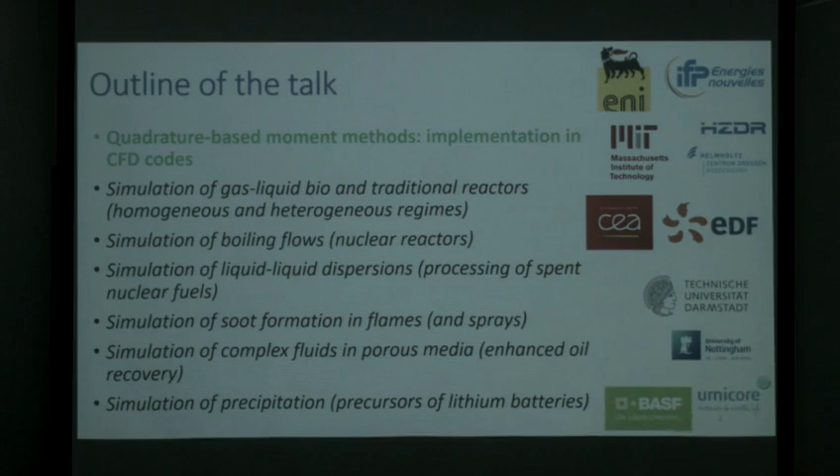Then I'll show you some of the recent work that we are doing in the field of boiling flows, liquid-liquid dispersions. Then there are a number of other applications that I will not talk about for the sake of time: soot formation in flames, complex fluids in porous media, and simulation of precipitation and crystallization of solid particles. As you can see, all these applications have something to do with energy production and energy storage, which is the theme of this workshop.

So some of the fundamental work is done with money coming from the European Commission, and following up on the discussion we had yesterday, I can, if you want, discuss some of the ideas currently discussed at the European Commission level in order to find ways to fund research projects in fluid mechanics.

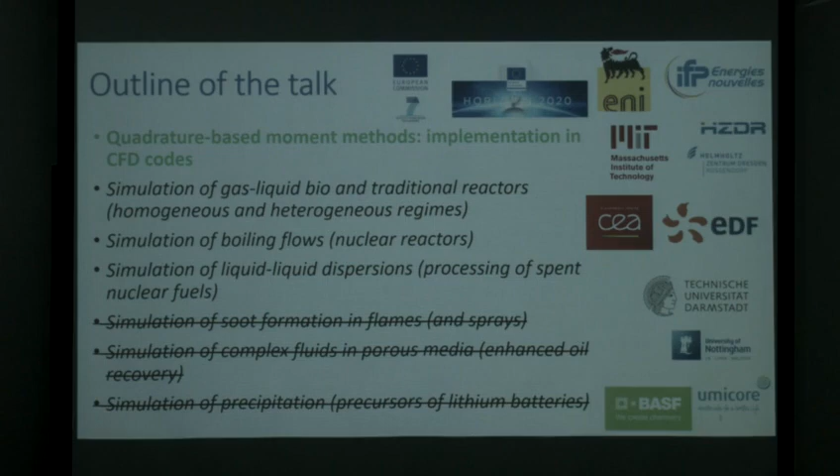All right, so what we do, as was explained by Rodney on Monday, is to basically look at multiphase systems through distributions by looking at this governing equation, this master kinetic equation. And the distributions we look at are bubble or droplet size distributions in our case.

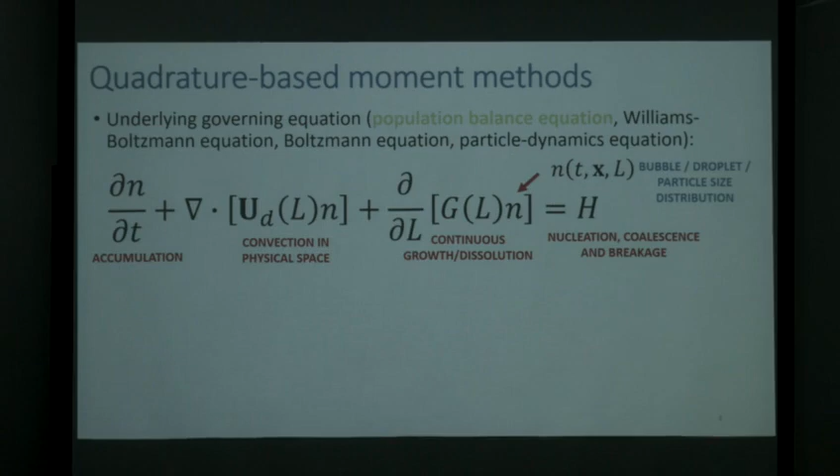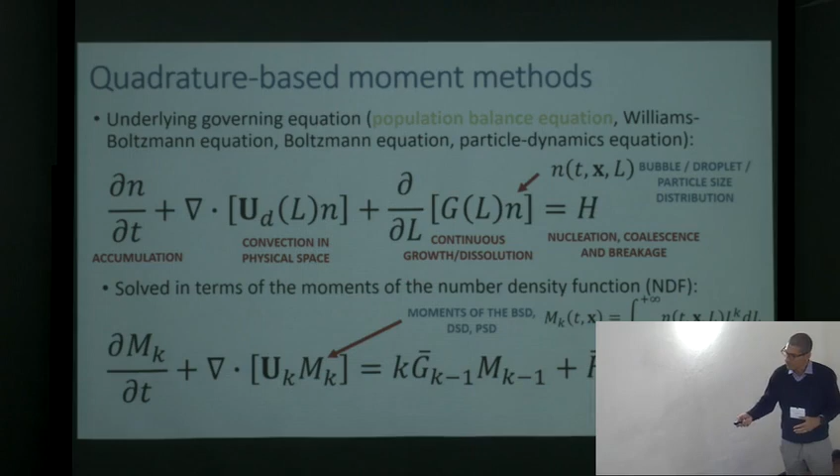And instead of solving this equation directly, what we do is to look at the moments of this distribution. So in this case, the moments are just functions of time and space. Therefore, the governing equation can be solved within CFD with finite volume discretization.

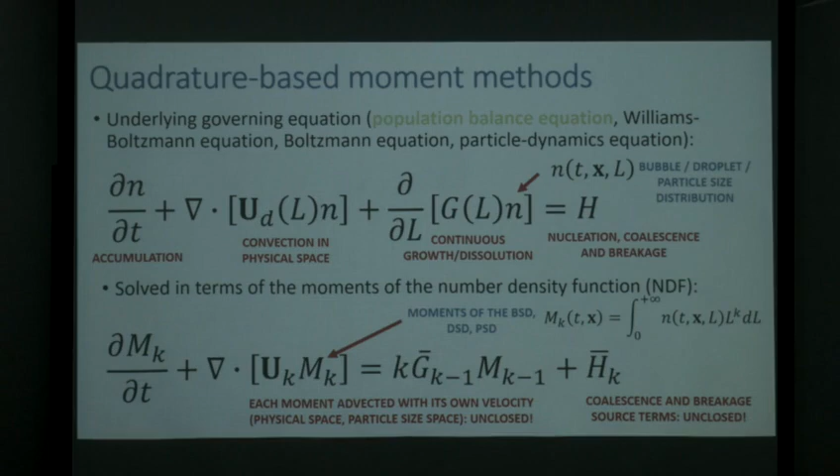You end up with a closure problem, and the closure problem is related to movement of the elements of the dispersed phase in the physical space, but also is related to the rate with which these elements of the dispersed phase, mainly bubbles in the presentation, coalesce. So one way to overcome this closure problem, which is a mathematical closure, is to use a quadrature approximation, because the closure problem is at the end an integral, and one efficient way to calculate an integral is to use a Gaussian quadrature approximation.

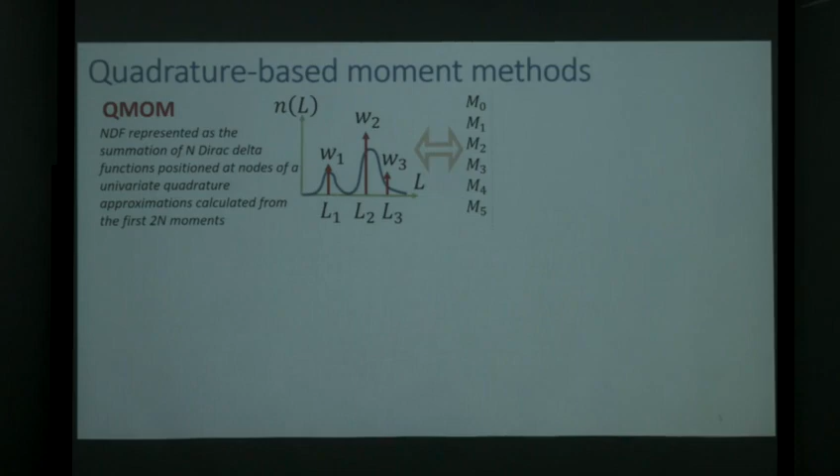So the idea is very simple. It was developed in the late 90s by McGraw. The method is called QMOM. We take a set of moments of these unknown distributions, and we use these moments to calculate the quadrature approximation, the nodes and the weights of this quadrature approximation.

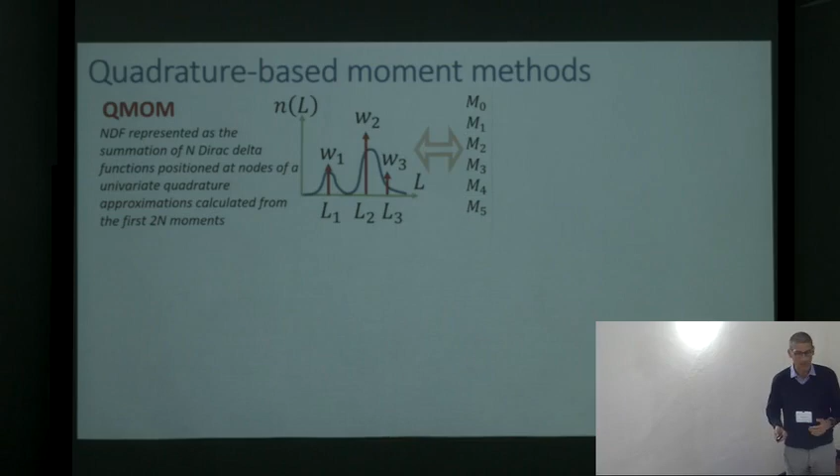This is basically equivalent to assuming that this population of bubbles and droplets is constituted by some small, medium, and large bubbles, and this is equivalent to assuming that the underlying distribution, which is unknown to us, is constituted by a summation of Dirac delta functions. This is nice, working very well.

However, when you are looking into multidimensional problems, for example, we are very often interested in bubbles and droplets in which we have a component moving from the dispersed to the continuous phase, and you also have chemical reactions involved. In these cases, bubbles and droplets are not only distributed over their size, but also over their concentration. So in this case, you need to have a multivariate, a bivariate in this case, quadrature. And to do that, you need to use another method, which is based on the idea of conditional moments. It is called conditional QMOM.

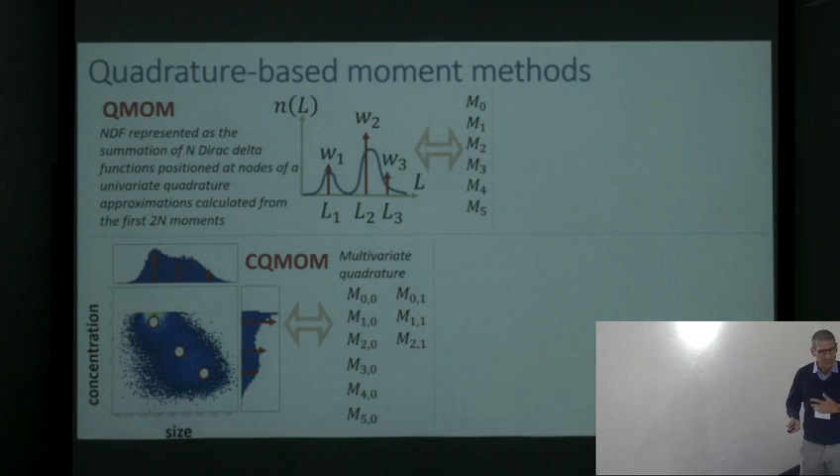In some other cases, you might want to replace these Dirac delta functions and this representation of the number density function of the distribution in terms of continuous functions. The extension of this methodology to generic kernel functions was done by Rodney and his collaborators in Paris, and is called extended QMOM.

And some of the results I'll show you today have been obtained by running simulations with QMOM, CQMOM, and DQMOM. And I will also try to give you a feeling of what are the issues that you encounter when you try to implement these methods into CFD codes, mainly using commercial codes such as ANSYS Fluent and open source codes such as OpenFOAM. All right, so very quickly, what are the main issues you encounter?

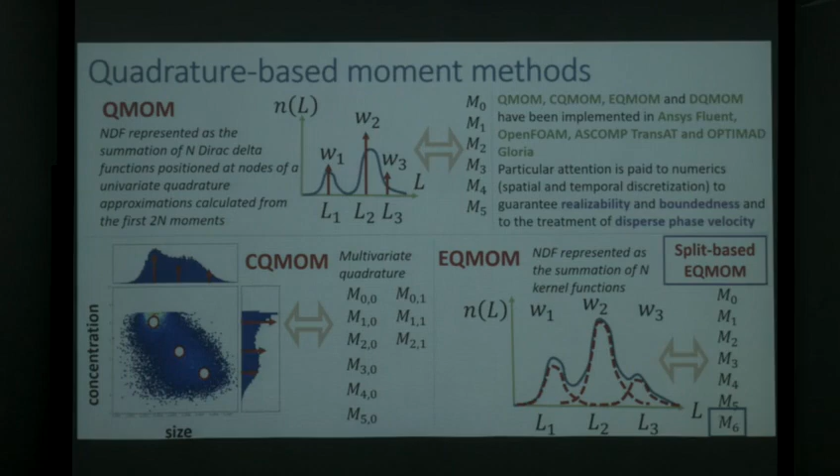Some of these are numerical issues, some others are instead issues related to the treatment of the disperse phase velocity. So as far as the disperse phase velocity is concerned, what we typically do is to either assume that all the bubbles, all the droplets are moving with the same velocity, which you can calculate with algebraic models or differential models by using the mean size of these particles, of these droplets or bubbles.

In some cases this works, but in some others it doesn't. So you have to assume that bubbles and droplets of different sizes will move with different velocities. To do that, you can assume that there is instantaneous equilibrium between the bubbles, the disperse phase elements, and the surrounding continuous phase. And you can, for example, assume that there is a relationship between bubble or droplet velocity and bubble or droplet size, and that this relationship is a polynomial.

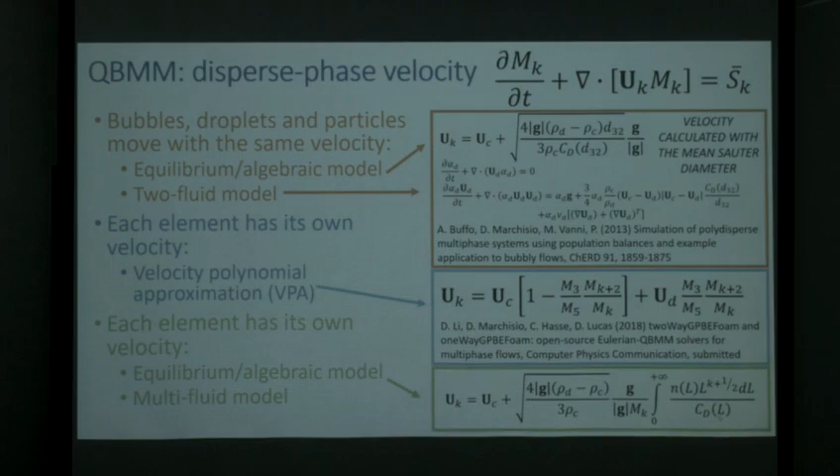If you do that and you plug this velocity polynomial approximation into the moment equations, you end up with a closed set of equations, because the unknown coefficients can be calculated as a function of the known moments. And there are then other ways to treat that, and some of them have been discussed by Rodney on Monday, but the results I'll show you today have been obtained by using these two approaches.

What we are trying to do, especially when it comes to the application of these methods in OpenFOAM, is slightly different from what other people are doing. We are trying basically to develop libraries that we can attach not to one single specific solver in OpenFOAM, but that can be transferred from one solver to another.

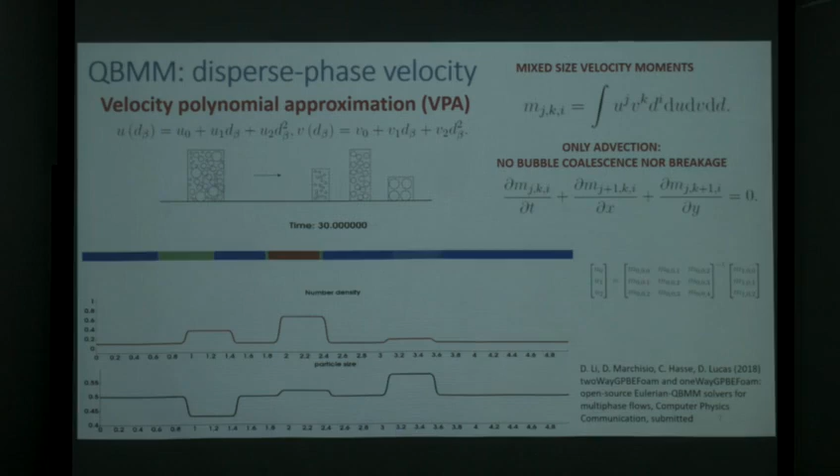And so in this paper, which we submitted to the Computer Physics Communications journal, we are showing how that is done. And if the paper is accepted, attached to the journal there is a repository from which you can load the solvers, and here I'm just showing an animation in which this velocity polynomial approximation is used to simulate segregation by size moving in a stack.

I can probably be a bit quick on that. It was extensively discussed by Rodney. The main problem is that moments are not just random numbers. You typically solve the equations for some moments of the size distribution. You need to use numerical methods that preserve the relationships, the constraints that the moments have to respect. The most intuitive is variance, the relationship between M2, M1, and M0, because the variance of the distribution is positive. So when you are using, for example, a first order upwind spatial discretization scheme, everything is fine.

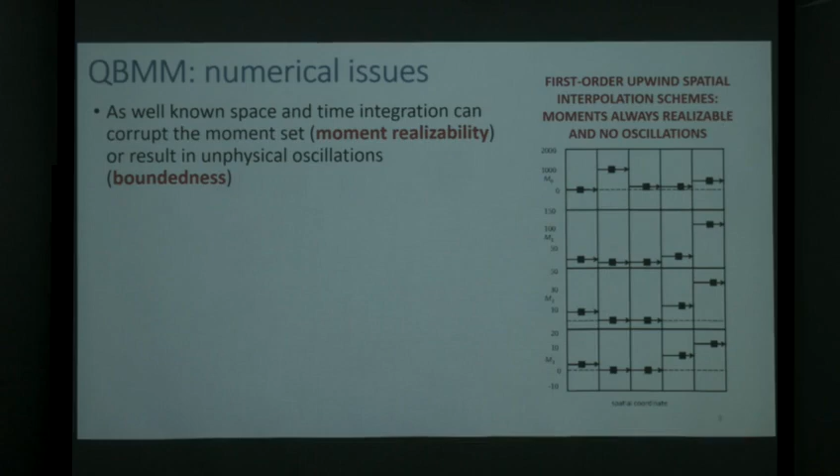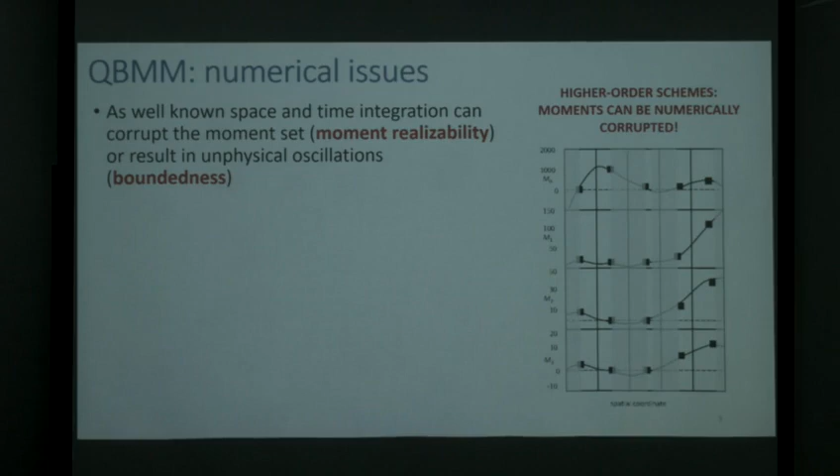As soon as you move to higher order schemes, what can happen is that, from time step to time step, you can break some of these rules and some of these constraints. And that is basically leading to a disaster. So there are mainly two solutions to address this problem. When you're using commercial codes, there is really very little control that you have over the way in which the equations are solved and integrated.

So in this case, the strategy we are using is basically a brute force method in which we implement algorithms that are capable of telling you whether a set of moments is realizable or unrealizable. And if it is unrealizable, the algorithm is also capable of changing one of the moments in order to take an unrealizable moment set and transform it into a realizable moment set.

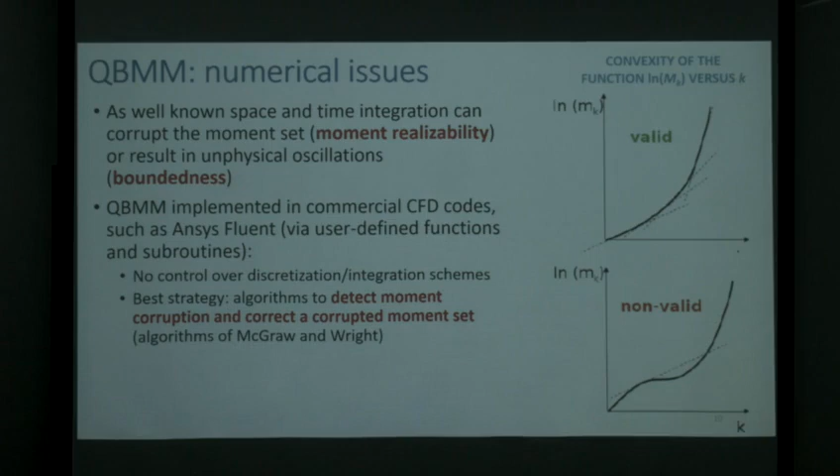Of course, if you are instead using an in-house code that you wrote yourself or an open source code in which you can play a lot with the way in which the equations are integrated, then you can do something better. You can, for example, follow the instructions of this paper that shows you how you can implement a numerical scheme that preserves realizability.

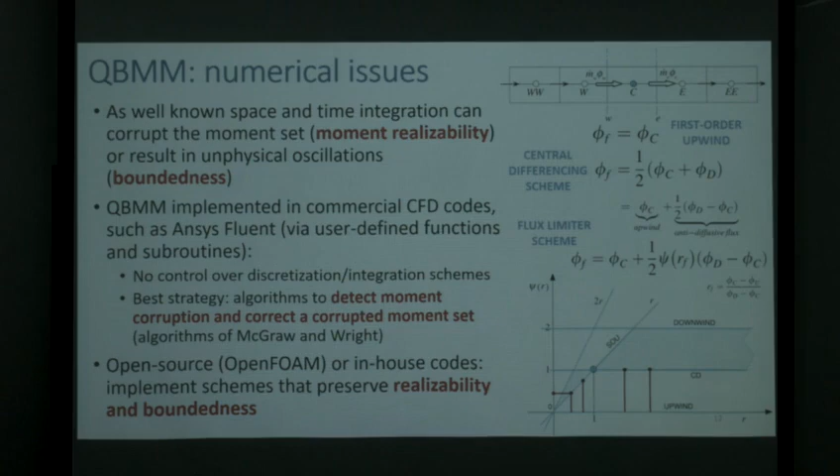Because we are trying to develop this library which is compatible with different solvers, what we are trying to do is to use numerical schemes that are the very same schemes used in other parts of the code. And so what we do is to use, for example, flux limiters also for the moments, and we have developed a way to do that preserving not only realizability but also boundedness.

So in this paper that we are submitting to the Journal of Computational Physics, we are showing how that works for a simple pure advection Riemann problem. We have the classical analytical solution, and basically the method is capable of having high accuracy and also avoiding oscillations.

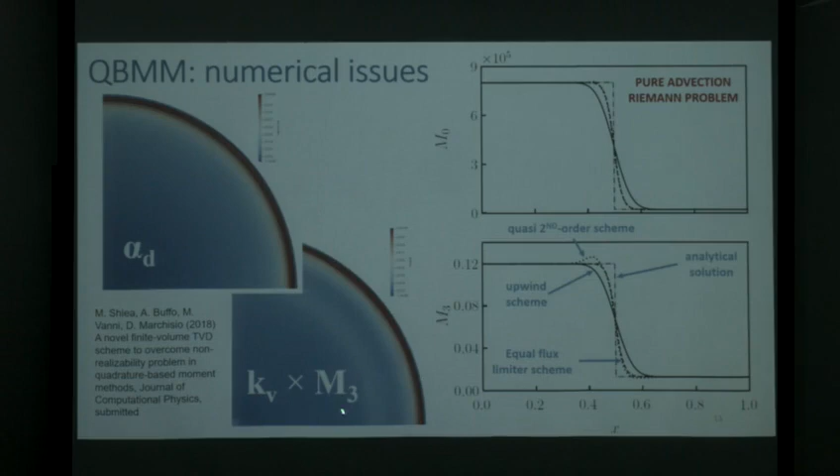We are worried about oscillations because the moment of order 3, for example, with respect to bubble size is related to volume fraction, and volume fraction has to be bounded between 0 and 1, of course, and you want also the moment of order 3 to be bounded in the same way.

All right, so that's enough for the theory. Let's go through some of the applications. The idea is to go together through these applications and find and discuss what are the possible challenges to simulate real industrial processes. So the first example is gas-liquid bioreactors. We heard it on Monday and Tuesday.

When you want to simulate gas-liquid systems, but also other multiphase systems, of course, you need to include all the interfacial forces, and drag is one of the most important forces. We have correlations telling us what an air bubble is doing in pure water, in contaminated water, but these are correlations valid only for isolated bubbles. If you have bubbles in a bubble column, then you have the interactions between the different bubbles, and that usually is accounted for through correction factors that account for this swarm effect.

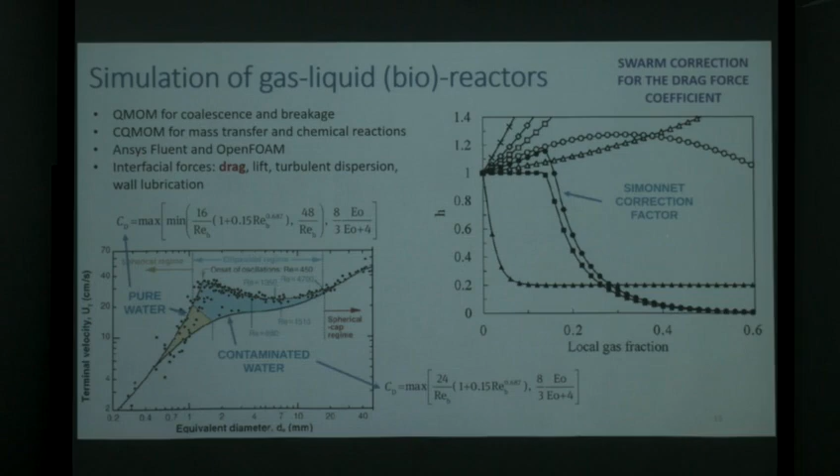There are many correction factors available. We are using, for example, this Simonnet correction factor, which is completely empirical. And to give you an idea of how important that is, these are experiments and simulations that we have run together with IFP Energies Nouvelles. This is the global gas holdup in a bubble column versus the superficial velocity. These are the experimental data.

This is the prediction you get by using the drag force correlation for the isolated bubble. That, as you can see, is completely wrong, whereas this is what you can get with this correction, which is, of course, much better. There are two things I should say here. The first one is that by using such an approach, you can switch from homogeneous to heterogeneous regimes in a continuous way, also describing what is happening at the transition between the two.

But of course, this correction is fully empirical. So there is no theoretical basis. There are numbers in the correlations which work for this case. By the way, we had in this case to play a trick on the trick, because the correction has to be corrected further in order to have that. So clearly, this is not fully predictive, right? So I think as a community, one of the things we need to do is to look at some of these correlations and come up with better correlations by using, for example, the multi-scale strategy that was discussed yesterday and the days before.

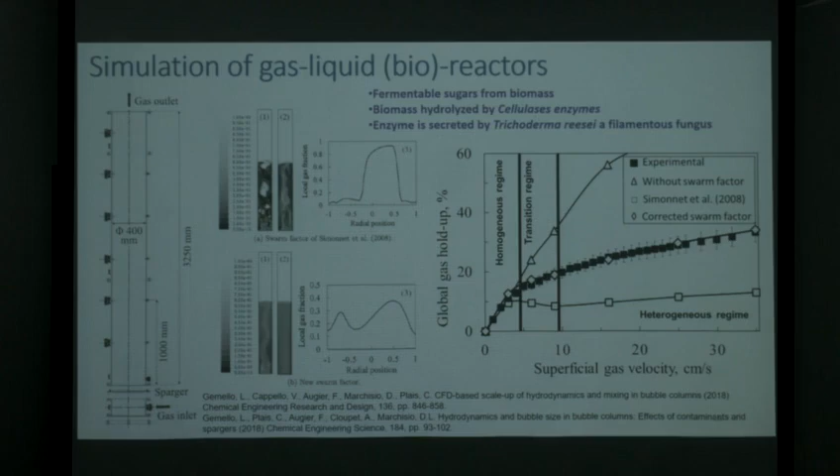Another important problem we are dealing with is the effect of additives. So again, to give you an idea of how important that is, this is again global gas holdup in a bubble column versus the superficial velocity. And these are measurements performed with demineralized water, tap water, and with a bit of alcohol. As you can see, the impact is tremendous, incredibly large. The additives impact not only the gas holdup, but also the bubble size. So we also need to come up with good correlations to address these issues.

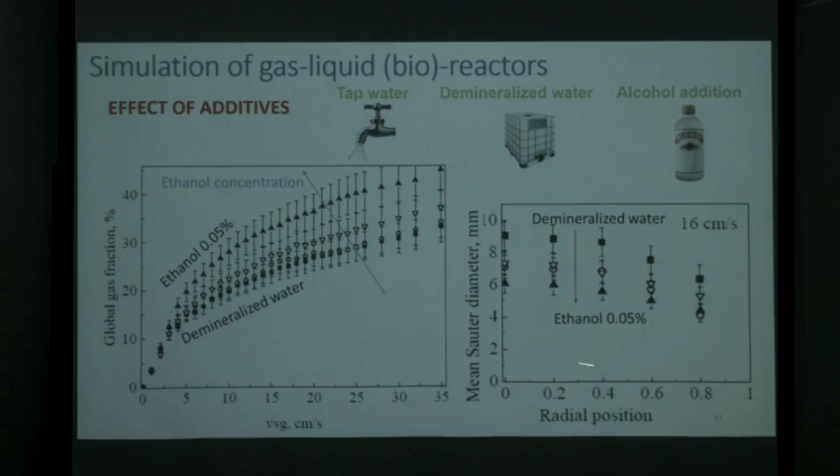For example, for coalescence and breakage, because clearly the effect of these additives is affecting the way in which bubbles are coalescing and breaking. So for coalescence and breakage, there are different models, which we call kernels, that can describe the way in which bubbles break and coalesce. There are many different mechanisms involved. In this presentation, I'll mainly talk about turbulent fluctuations.

For breakup, for example, there is one very famous kernel developed in the 70s by Coulaloglou and Tavlarides. This was one of the first ones. It is extremely robust. People are using it, but there is only a very limited number of phenomena accounted for in this kernel. So if you have, for example, a disperse phase which has a high viscosity, this is not the kernel you're supposed to use. And also, this kernel is not accounting for the presence of additives, if not for the interfacial tension. Also, you have parameters in these kernels that you need to fit from one system to another. They might change. So this is also another issue.

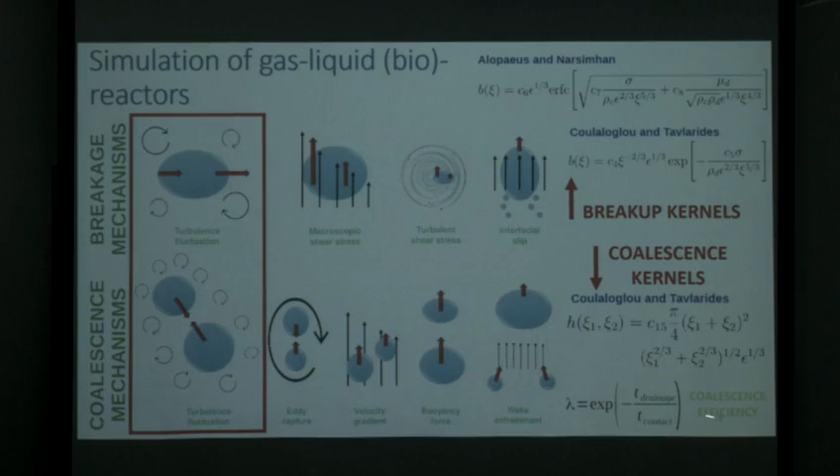Concerning coalescence, this is where the presence of the additives played the major role. Not much in the collision frequency, but in the coalescence efficiency. So the presence of chemicals affects the drainage time, which appears in this coalescence efficiency. The drainage time is the time required for the film of fluid in between the two colliding bubbles or drops to break down in order to allow the two bubbles or droplets to coalesce. And this drainage time can be calculated with models coming from physical chemistry considerations. The main governing equation there is the Taylor equation.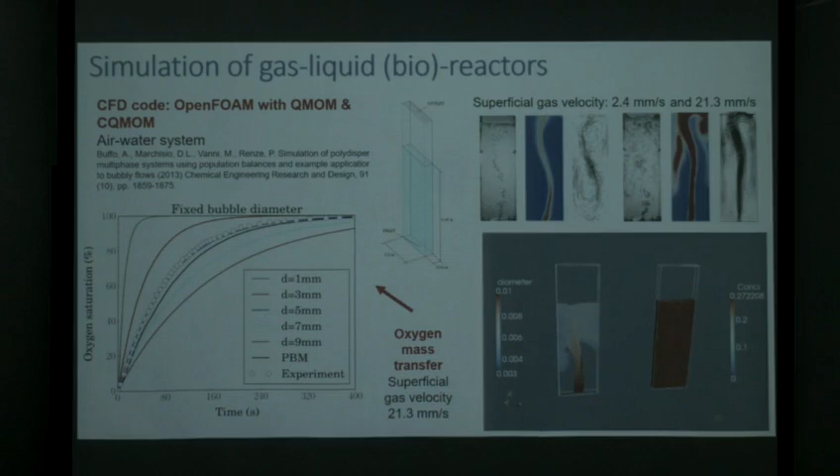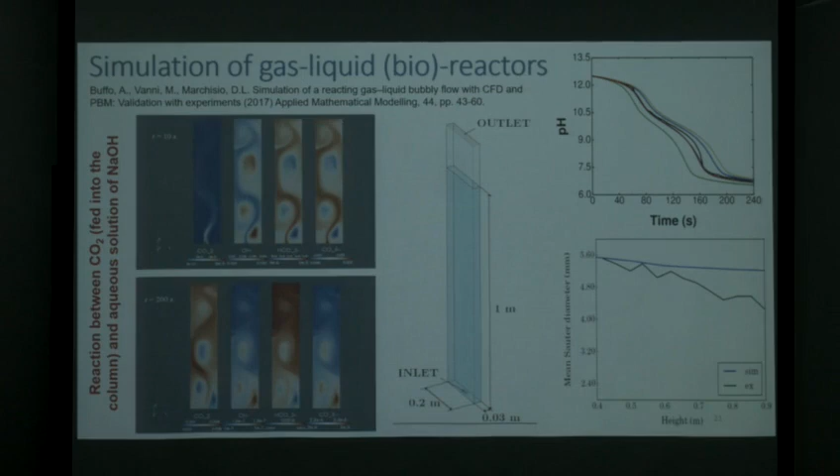We also looked into chemically reacting systems. These, for example, are some simulations that we performed on the test case that was investigated by Hans and his group a few years ago, and they also presented some of these results at this workshop. But for the sake of time, I'm going to move on and talk about another interesting gas-liquid system, which is the one referring to boiling flow.

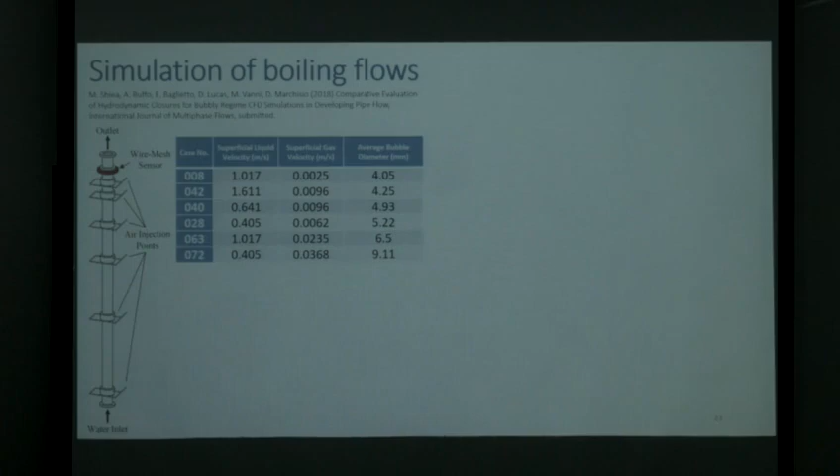This is work done in collaboration with MIT and this research center in Germany. Now, we are not really simulating a real boiling flow. That's too complex for us. So what we do is to simulate a gas-liquid system that mimics what happens in a real boiling flow. So we basically have a pipe, we throw water into the pipe, and then we inject gas bubbles at the wall. This is a cold experiment, room temperature, ambient pressure, and the bubbles are air bubbles.

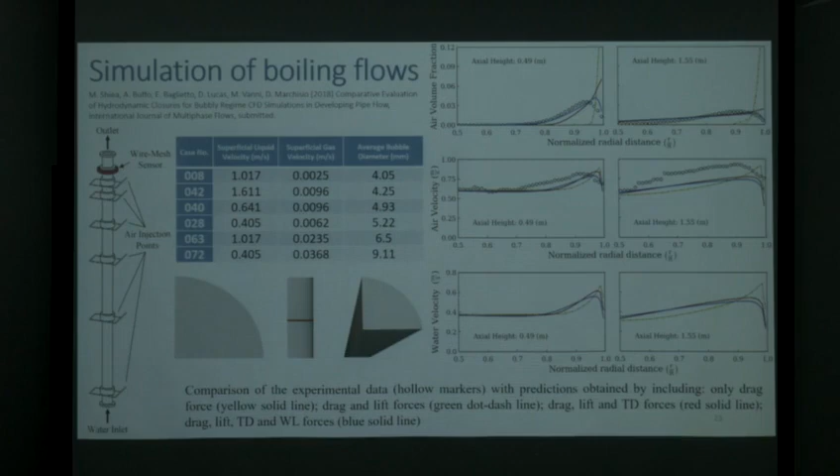The yellow line and the green line, which are the predictions obtained by using only drag and lift as interfacial forces, are completely wrong because bubbles stick to the wall and do not move from the wall. So to get decent predictions, you need to add additional forces, turbulent dispersion forces and wall lubrication forces, and this leads you to better predictions.

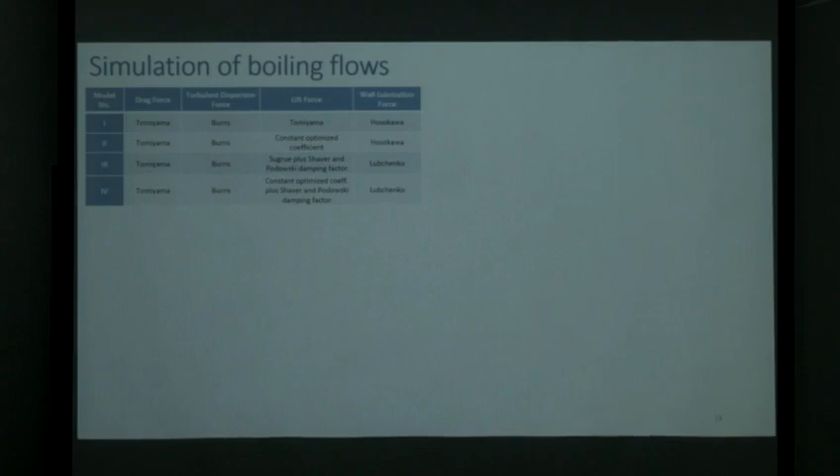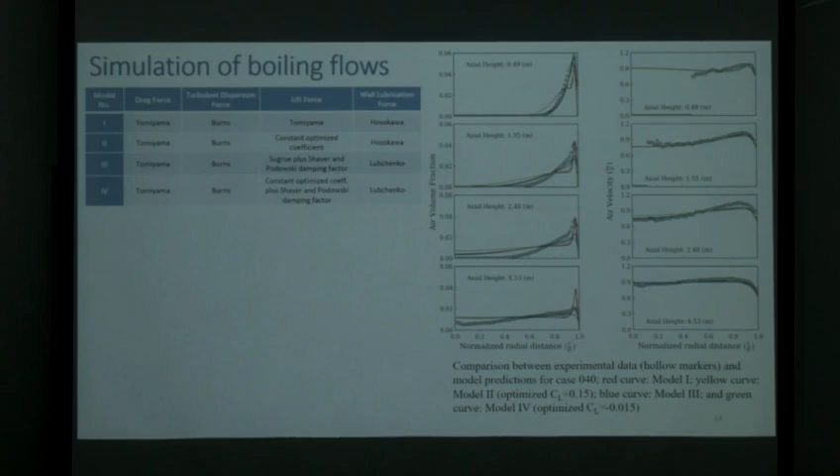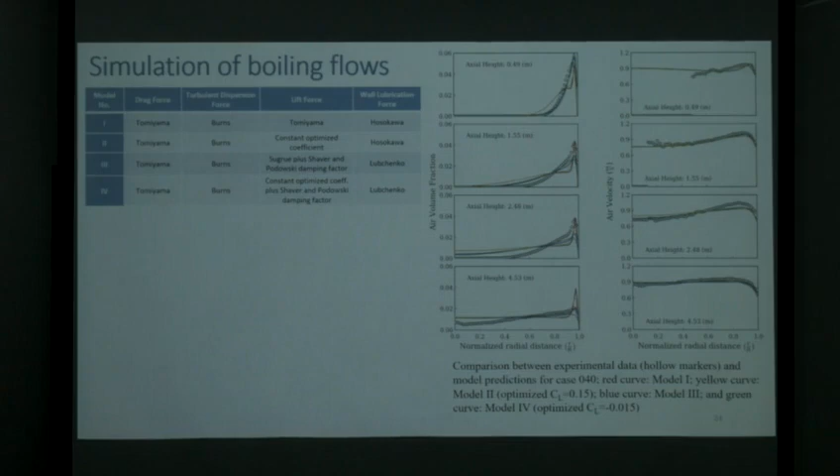So this way of comparing predictions at the macro scale level with experiments is useful, of course, because it tells you what kind of information you need to plug into the model to get the proper prediction, but it's not going to tell you which one of these models is the least wrong, if you don't want to call it the correct one.

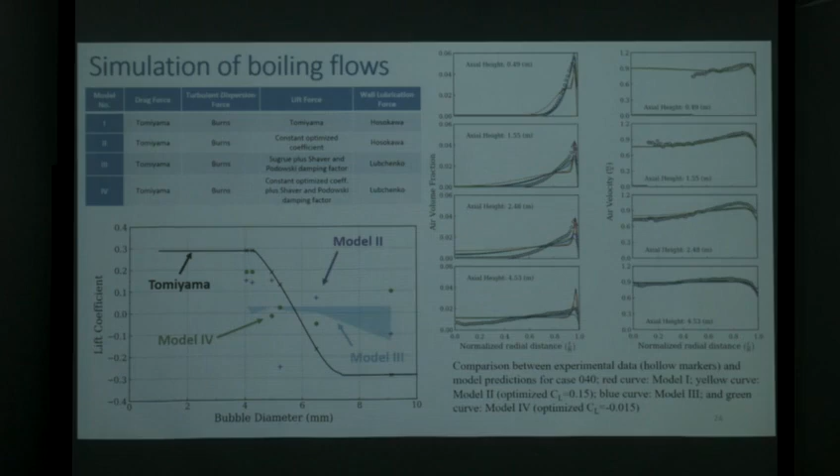And so we are now desperately, I have to confess, trying to make sense of this data, playing especially with the lift force coefficient and trying to understand what could be a way to have something reasonable out of this. All right, so liquid-liquid dispersions.

What we do here is mainly look at emulsions and dispersions in stirred tanks. What we did in this work was to basically take water as continuous phase and we looked at different dispersed phases ranging from pure toluene to silicone oils at different viscosities. And we tried to test different kernels, different models for coalescence and breakage, and see if we could, by using one single set of parameters, fit a large set of experimental data. About 15, if I remember well.

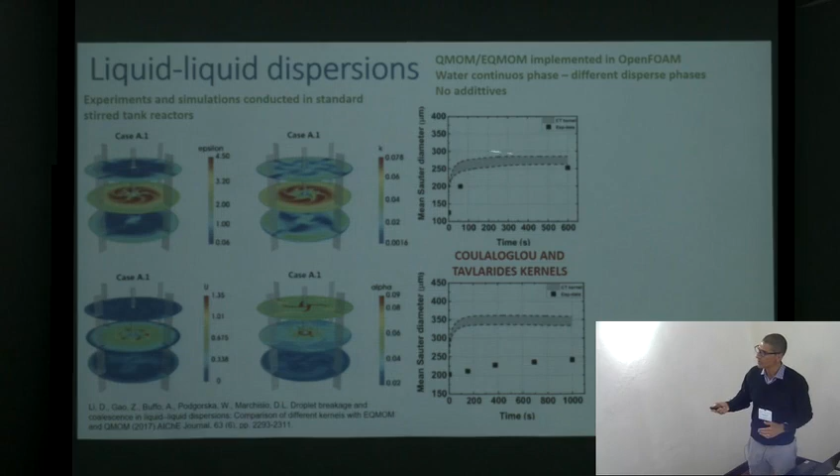So this is, for example, one of the outcomes by using these Coulaloglou and Tavlarides kernels, which are extremely simple but very popular kernels to describe coalescence and breakage. This is the mean droplet diameter versus time, experiments versus simulations. And this was, for 2 test cases out of these 15, the best we could get. So by using one single set of parameters, you cannot fit all the data. So of course there is work to do also in this area. We need to come up with better models for coalescence and breakage.

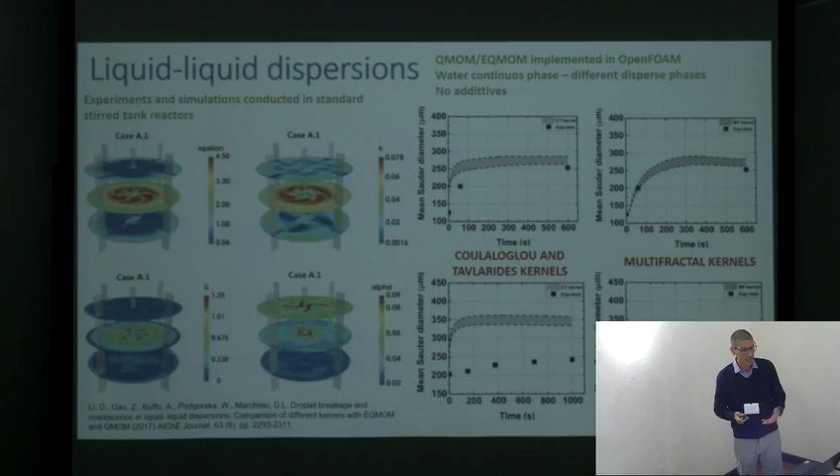And for example, one thing that we are doing is to look into the effect of intermittency. So we are sort of moving away from the homogeneous turbulence theory by Kolmogorov, and we are looking into, for example, the multifractal theory of turbulence to come up with more robust kernels with less empirical parameters, but with parameters that can be also estimated in other ways.

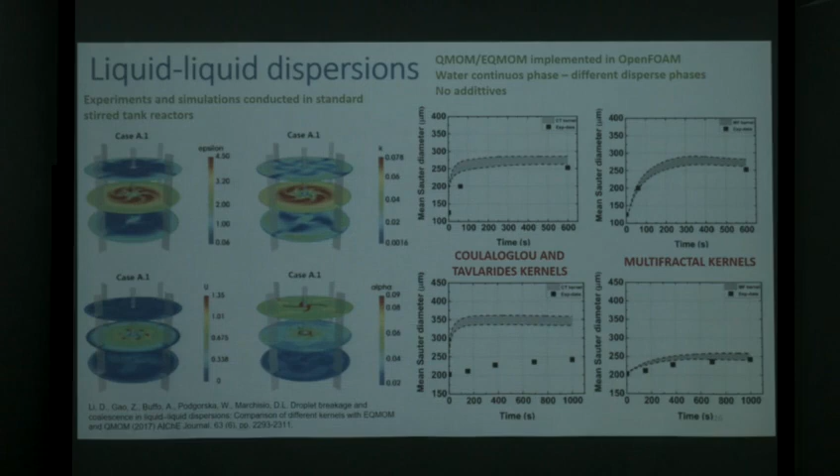And this is just an example. The agreement is better not only in terms of the final steady state value, but also in terms of the dynamics. A very well-known problem is that with Coulaloglou and Tavlarides kernels, you get to the steady state too quickly with respect to experiments. Another important issue, which I discussed already, is the presence of additives.

As I mentioned, and as a chemical engineer, I'm interested in simulating real systems with real chemicals, so you have many components. These are simulations and experiments run in an emulsion with water and toluene with a surfactant. And as I mentioned before, the place where the presence of the chemicals shows up is the efficiency. So this is the efficiency versus the droplet size. And these two lines correspond to different surfactant concentrations. And of course, this is a way to account for that.

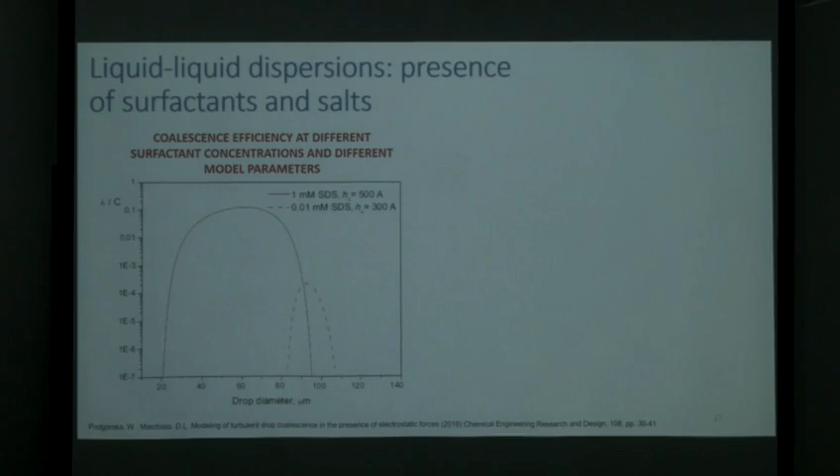But one problem you have is that in this drainage time that I briefly talked about before, there are a number of parameters that appear. One of them, also mentioned by Olivier, I think, on Monday or Tuesday, is the critical film thickness, the thickness of the film shortly before rupture and coalescence. This is something that is difficult to estimate, difficult to measure, and this is an important parameter in the model. So there is, again, work to do in this area, maybe by looking also at atomistic and molecular simulations.

And looking at that, especially in liquid-liquid dispersions, is extremely important if you want to describe some hysteresis effects that people see in the experiments. So I don't have time to explain all that, but basically what you do in the stirred tanks is to play with the stirring rate, going up and down, and you see some hysteresis effects. And if you want to reproduce them with these CFD simulations, you have to account properly for the presence of additives in the coalescence efficiency.

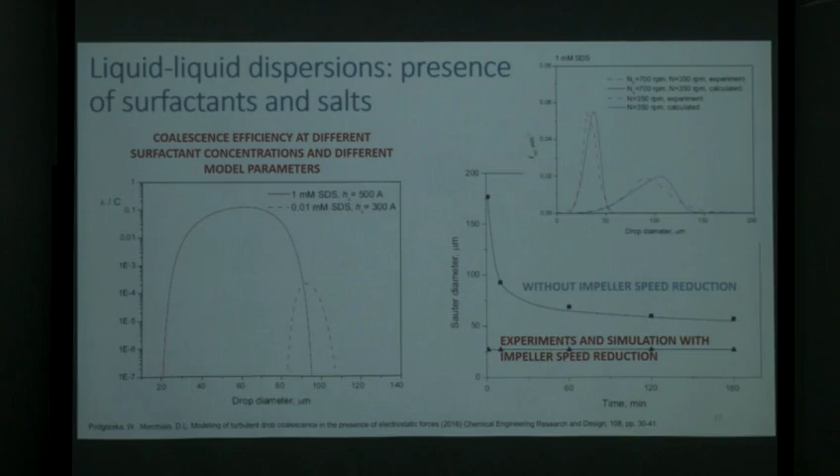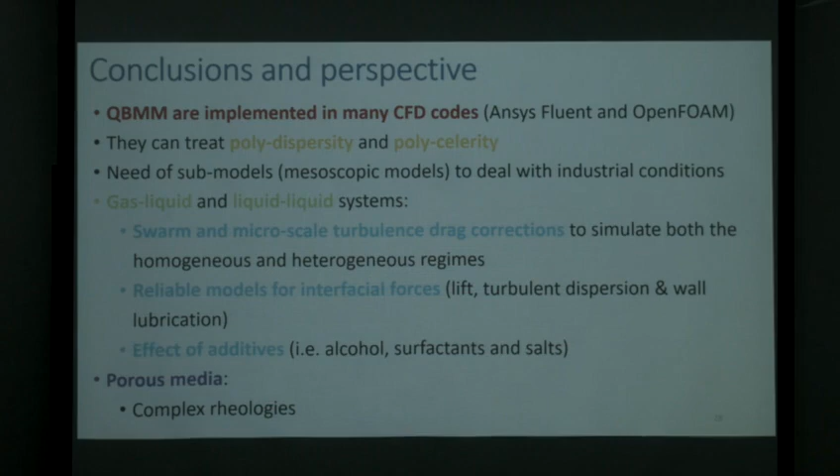All right, so these are my conclusions. I'm not going to repeat. I think it was pretty clear there is a lot of work to do, especially for the physical models, for drag, coalescence and breakage, as well as the other interfacial forces that I mentioned. One thing I want to mention as final remark is that, and someone else, I think it was Lachlan, was mentioning that there is a growing effort, especially in Europe, in the idea of building open simulation platforms that can promote the use of CFD, and not only CFD, to a wider audience.

So there is a European project that just started, which is called VIMMP, which wants to do that in the context of a marketplace for materials models. And the platform that we are trying to use for the project is the Salome platform developed by EDF. And we are also planning to integrate some machine learning tools, mainly for parameter fitting and model sensitivity analysis, together with IBM. And then we have a number of industrial partners who are providing us with challenging problems, and hopefully in the next workshop I'll be presenting some results concerning the simulation of a more interesting emulsion, which is mayonnaise.